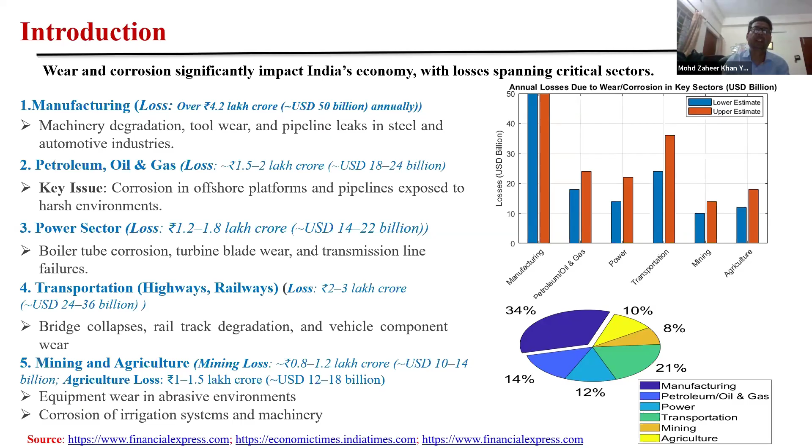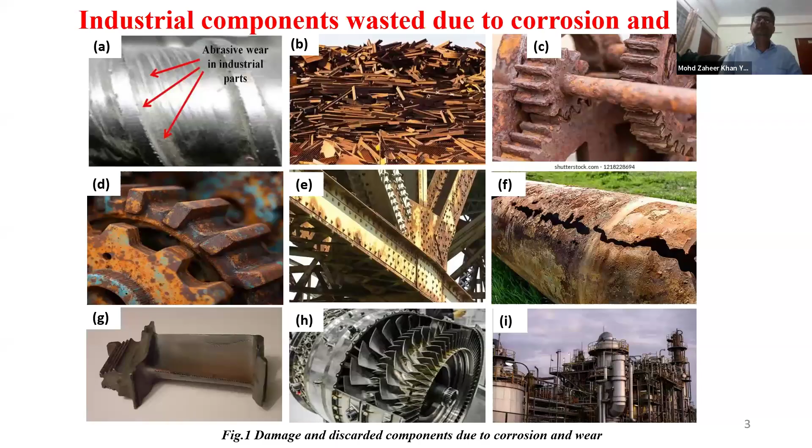So corrosion and wear cause great damage, and we have to do something about it. So what can we do? As I have mentioned, the materials that we are using are bound to get corroded. So there are two solutions that are available. One solution is that we use a material that itself is corrosion resistant, that is those metals and alloys that don't rust.

So generally what we see is that those materials that are corrosion resistant, that don't rust, are generally expensive materials, and these materials are not only expensive because of the raw material cost, but are also difficult to manufacture into the components and products that we desire to make. And second, an important thing is why at all use an expensive material when this corrosion basically affects only the surface part of the material.

So let us say we have got a component that is corroding. If we can do something to the surface, then the surface will not corrode and the underlying material automatically gets protected from corrosion. Similarly, if we talk about wear, then wear also is a surface phenomenon and it happens on the surface of the material. When two surfaces are rubbing against each other or some fine particles are impinging on the material, they are initially damaging the surface of the material.

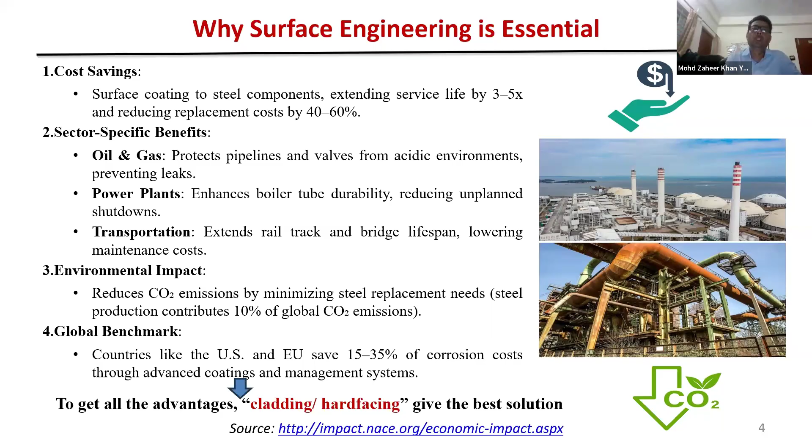So what is surfacing? Surfacing basically refers to the technique of depositing a material over a base material or substrate to impart some desired properties to the surface that are not intrinsic to the underlying material.

That means if we have a piece of material, it will have some intrinsic properties. If by some method we can deposit another layer of material on the chosen material such that its surface properties are altered in a desirable fashion, properties not inherently present in the material can be imparted on its surface. This is what is basically known as surfacing.

This property of corrosion resistance and wear resistance can be brought about by depositing the material with a layer of another material, and this additionally deposited material will have those desirable properties. If corrosion resistance is required, the deposited material will be corrosion resistant. If wear resistance is required, the deposited material will be wear resistant.

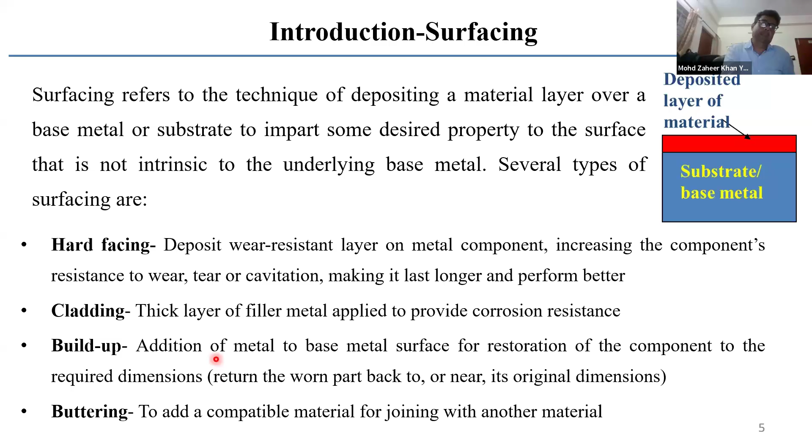So in this case, before the components are joined, a third material, generally Inconel, is deposited on the stainless steel. Since Inconel has a sufficient amount of chromium, the phenomena of sensitization will be prevented even if some carbon is migrating. This is another process of surfacing known as buttering.

Now let's talk about cladding. Cladding is the deposition of a material layer on the component surface to increase its corrosion resistance against a harsh environment. The cladding material acts as a barrier between the substrate and the corrosive environment.

The cladding we deposit can be either thin or thick cladding. Thin cladding is also known as film coating, generally a few microns in dimension, with a maximum of about 1,000 microns. These are generally carried out by processes like electroplating, physical vapor deposition, and chemical vapor deposition.

These coatings, being thin, act as a barrier, but if any problem happens to this thin coating—if it gets peeled out or scratched—then the underlying material will very easily be exposed and corrosion of this material will take place.

As an alternative, we can also deposit a thick coating, ranging from 1 millimeter in thickness to several orders of millimeters. For thick cladding, we cannot use physical vapor deposition, chemical vapor deposition, or electroplating because it would be very time consuming to develop thick films by these processes. So arc welding, explosive welding, laser cladding, and thermal spraying are generally used to deposit thick cladding.

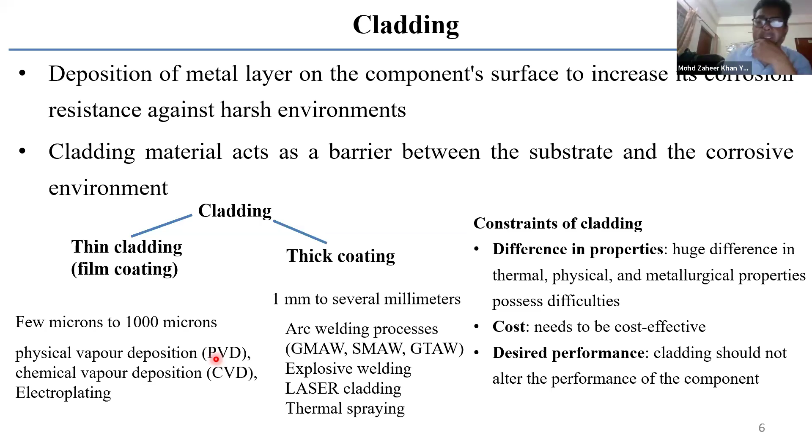The desired performance—the essential properties—means the cladding should not only perform well, but should not alter the performance of the component. So when depositing a material, we should ensure that the underlying material, on which we have deposited, does not undergo any adverse changes. Let us say we are depositing stainless steel on top of mild steel—this cladding process should not make the mild steel weak. Because if it becomes weak, it will not be able to sustain the loads it is expected to sustain. So that is another constraint in the cladding process.

In gas metal arc welding, there is already a filler material acting as one of the consumable electrodes, and a welding arc is made between the substrate and the filler material. In this case, the filler material will be made up of a corrosion resistant material. For example, if we want to clad stainless steel on mild steel, the substrate material will be mild steel, and the filler electrode used in GMAW will be made of stainless steel. When welding is performed, this filler material melts in the arc and gets deposited on the substrate, and successive passes of the GMAW process can completely cover the substrate with stainless steel. Similarly, other arc welding processes like GTAW can also be used.

Similarly, another arc welding process, GTAW, can also be used. GTAW is characterized by a very stable arc and a very clean weld. As you can see in this figure, there is a torch, an arc is produced, and a wire of the desired material is fed in. It melts in the arc and is deposited on the substrate. You can see the substrate underneath, and on top of it, round spherical layers of stainless steel or other clad material have been deposited—this is how cladding is performed.

There is another process known as thermal spraying that can also be used. Here you can see that there is either an arc, or in this case a plasma. An arc is initiated between the positive terminal and the negative terminal housed inside the torch.

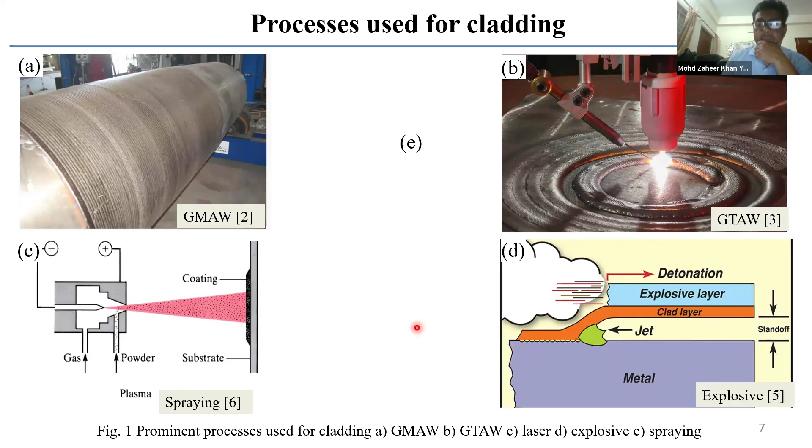So this is a small result that we are showing. In this case, we have deposited a layer of copper on mild steel substrate using gas metal arc welding process. The substrate was of mild steel. It was made as one of the terminals connected to the power source. The electrode in GMAW process that was used was of copper.

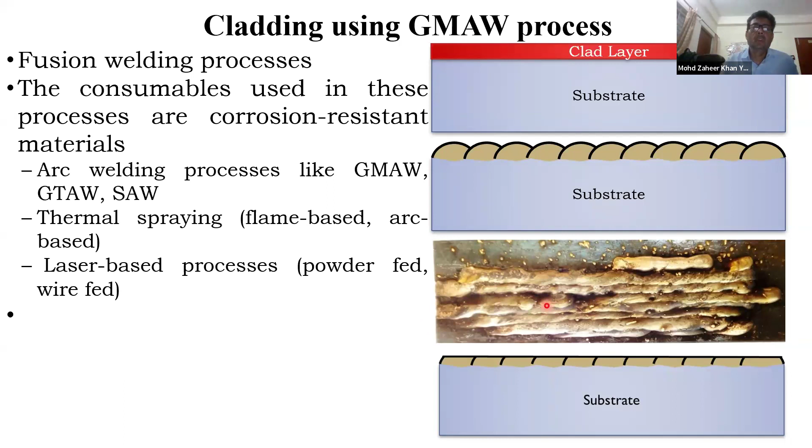So the copper electrode was passed and an arc was established between the copper electrode and the mild steel substrate. And here you can see successive layers of copper have been deposited on the mild steel substrate. Of course, whenever we are using these different dissimilar combinations, we have to do a lot of trial runs, and this is the photograph of the trial runs that were carried out, where the process parameters were optimized so that we can produce clad layers of sufficient quality.

When we are performing this experiment of depositing copper on mild steel using GMAW process, then several challenges occur. As you can see in this bottom diagram, when CO2 was used as a shielding gas, then a lot of spatters were occurring, and although beads could be established, because of the spattering, the surface became very rough and it was hardly any use.

When a little bit of argon was mixed with the carbon dioxide, so one of the students worked on this and he made a small setup where CO2 and argon could be actually mixed and fed as a shielding gas. Then the amount of spattering was less and we could successfully deposit copper on top of the mild steel substrate. So just to have a look as to how this clad layer has been performed, the plates were cut as shown in this figure and their cross section was examined.

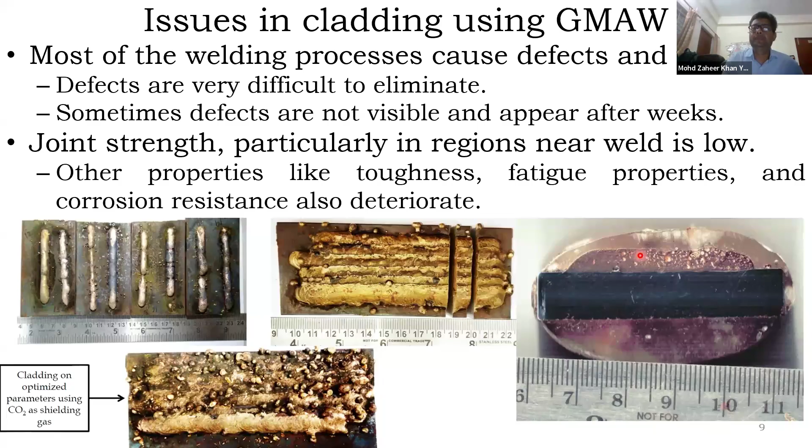So if you can see this cross section, this is the substrate of mild steel, and here on top you can see copper has been deposited. One thing that you will immediately agree is that a very uniform and thick layer of copper could be deposited on mild steel. But what is significant to note over here is that there is a lot of porosity present. So the clad layer, although it could be formed properly, has led to formation of a lot of porosity, and therefore this is problematic.

Another process that is commonly used and we are also using regularly is laser cladding. So laser cladding is basically an additive manufacturing process where laser is used to melt the material and the coating material both, and they can be deposited for cladding purpose also. Apart from performing cladding, this can also be used for the repair of the micro cracks that are present on the surface. It can also be used to reinforce or build up components that have worn.

It can naturally be used for prevention of corrosion and wear, that is cladding and hard facing, and this can also be used to customize the surface property of the material, that is, you can have a combination of powders where you can impart both corrosion resistance and wear resistance.

In laser cladding process, a laser heat source is utilized to deposit a thick layer of generally 0.05 mm to more than 2 to 3 mm of metals or ceramics, known as clad, on a solid substrate through this process. So you can see in this diagram, there is a laser light that is coming. It is producing intense heat.

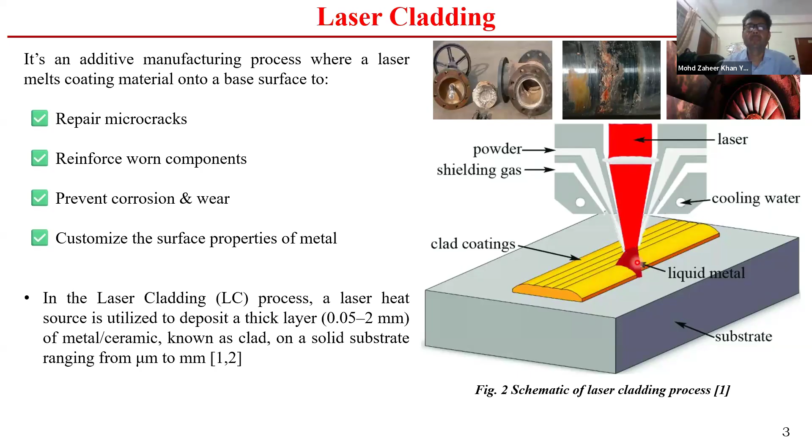There are several potential applications of laser cladding. So it can be used for the restoration of the gears. The gear surfaces that have worn out and the bearing surfaces that have worn out can actually be restored by depositing a layer of material.

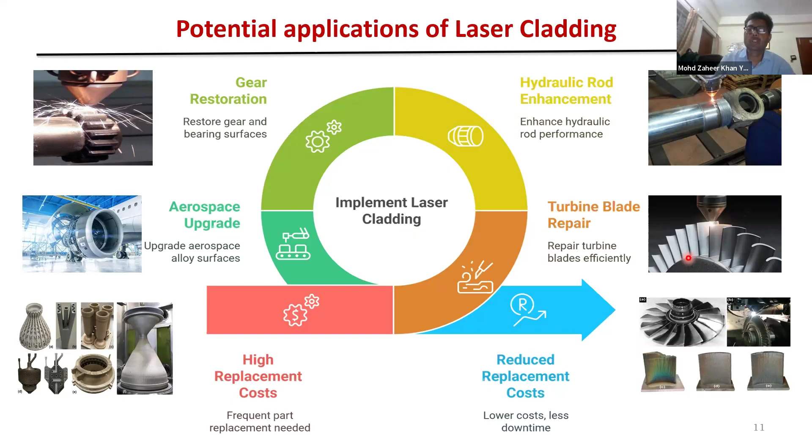They can be used for hydraulic rod enhancement in the hydraulic components. They can be used for the repair of turbine blades. They can be used also in aerospace upgradation. And in total, they will be reducing the high cost of replacement, and therefore it's a very much potential process. So this is basically the fundamental of the laser cladding system.

Laser cladding, also known as laser metal deposition, uses a focused laser beam to melt and fuse a layer of coating material. The coating material can be either in the form of powder or in the form of wire, which is put on the substrate. This enhances the surface properties like wear resistance, corrosion resistance, increases the hardness, or this can also be used for the repair of worn and damaged parts.

The core component of the laser cladding system is a laser source. The laser source can be many. It can be either a solid state laser, a fiber laser, diode laser, or CO2 laser. Only thing is that the power of the laser should be sufficient to melt the material and sometimes even the ceramics. There should be a beam delivery and optics.

So whatever laser is there, it is coming in form of a beam. This beam, to enhance its capability to melt the material, should be focused to a point, and for that you need a beam delivery system and the optics. Basically, they are in the form of lenses.

Now, this melting has to be accompanied with powder. So there should be a powder or a wire feed system. The material that has to be deposited can be in form of a wire, but generally it is in form of a powder. And this powder or wire is to be fed. And of course, since the entire surface of the substrate has to be covered, there should be a method by which the laser source and the powder can together move.

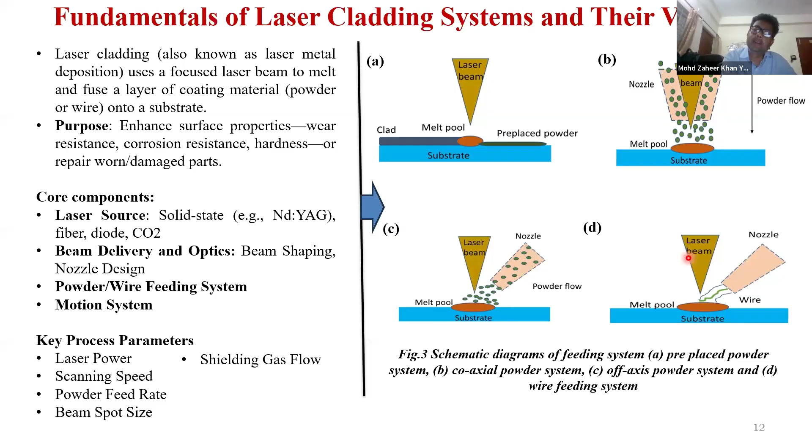There can be an off-axis powder system where the powder is being fed separately and the beam is actually following it and depositing the powder on the substrate. Similarly, wire can also be fed and the wire can be made to melt and get deposited. It is interesting to note that the wire feeding is generally done in an off-axis type of system.

This is the experimental setup that we have got in our lab. So there is a chiller because a lot of heat is being generated during the lasing operation. Of the energy that is given, only a part actually comes out in form of a laser, and most of the other energy converts into heat. So we need to have a very effective chiller to cool our lasing system, that is the laser source.

Apart from that, you need cooling pipes to protect your components, that is your cladding head, from getting damaged because of the laser. Similarly, in this figure, you can see this is the main laser head that is used. You can see that we can feed powder from these four sides. Inside this vertical tube, there are optics placed, and the laser will be coming at this end.

The powder will be also coming through this nozzle and getting deposited. There is a separate powder feed system that is attached to the machine. So we can actually use not one but more than one type of powder. The powder can be mixed also in this powder feed system, and it can be fed through the laser cladding

head and deposited. Generally, most of the material and the components need to be protected against reaction with the atmospheric gases. So argon is used as a shielding gas. But most importantly, this argon is also used as a carrier gas to make the powder flow from the powder feed system to the cladding head.

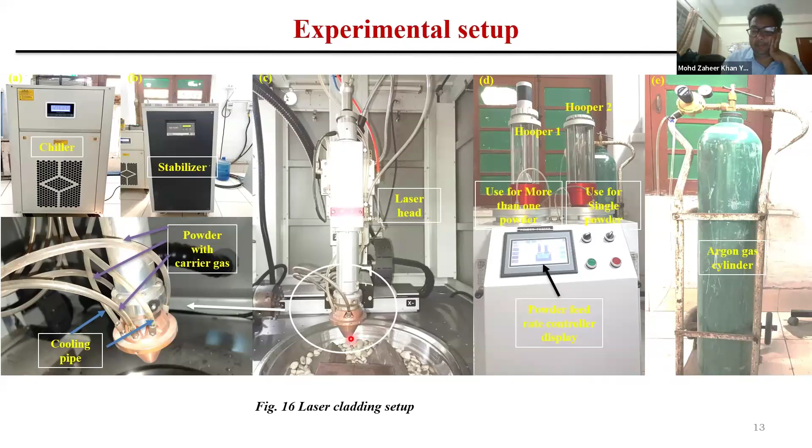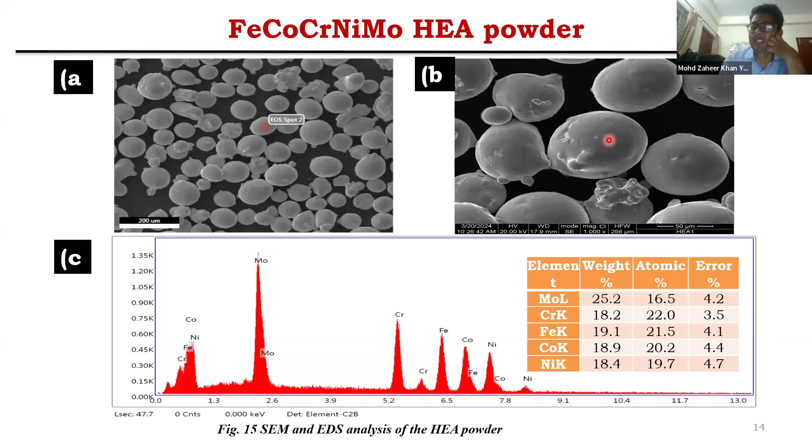So this is how the powder looks like. And let us say in one of the examples, a high entropy alloy powder was used. So you can see that it is having equimolar content of iron, cobalt, chromium, nickel, and molybdenum. So it's a 5 system HEA powder that has been used. And with EDX, you have to always confirm. The SEM will tell you whether the morphology is round or not, because this morphology affects its melting performance.

So, before any such experiment is performed, a single clad characteristic of the cladding has to be obtained. For this, a series of experiments were performed. So, what happened in this series of experiments is that we took a chosen powder, and we just made one single bead using the powder that is being used. So the laser head was moved on a plate from one end to the other end of the length of the plate, and a single bead was obtained.

This bead was actually cut across. When it was cut across, it looked like this, and this is the bead that we obtained after we have cut it and polished it. So after polishing, you can see there is a clad bead that is obtained, and the remaining portion is actually the substrate material. So, for any proper characterization, it is important that these parameters of the bead characteristic bead profile

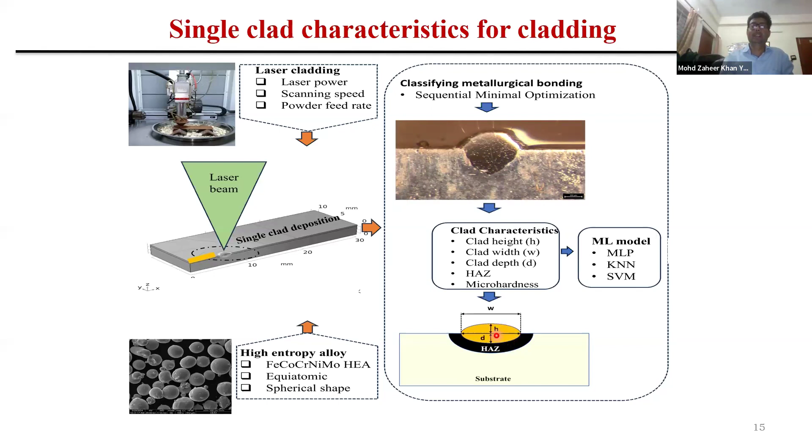should be noticed. The important characteristics are what is the depth of penetration or depth of melting that has taken place, what is the height of reinforcement that is created, that is basically corresponding to the thickness of the clad layer that has been obtained, then what is the width of the clad layer, what is the extent of damage that has been done to the substrate in form of a heat affected zone, and ultimately how this is performing. So micro hardness of the bead can be taken as one of the parameters.

So these types of experiments are performed. In this particular experiment, one of the students performed this experiment and deposited a single layer of clad in 16 different combinations of laser power, scan speed, and powder feed rate. And then these clad width, clad height, clad depth, heat affected zone thickness, and micro hardness. And apart from this, the dilution was calculated as this.

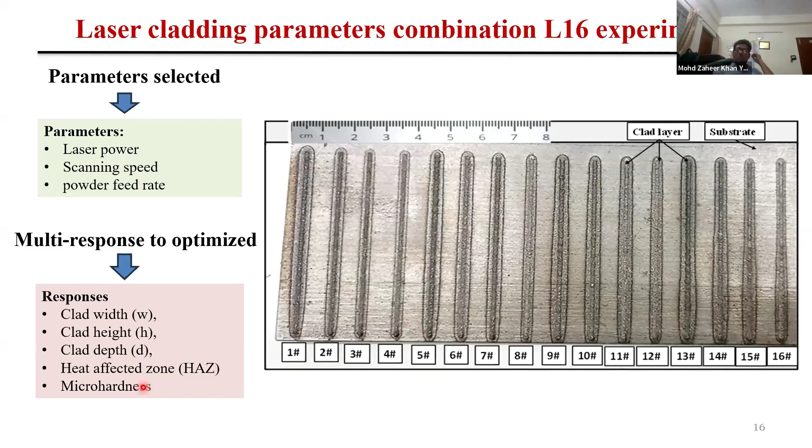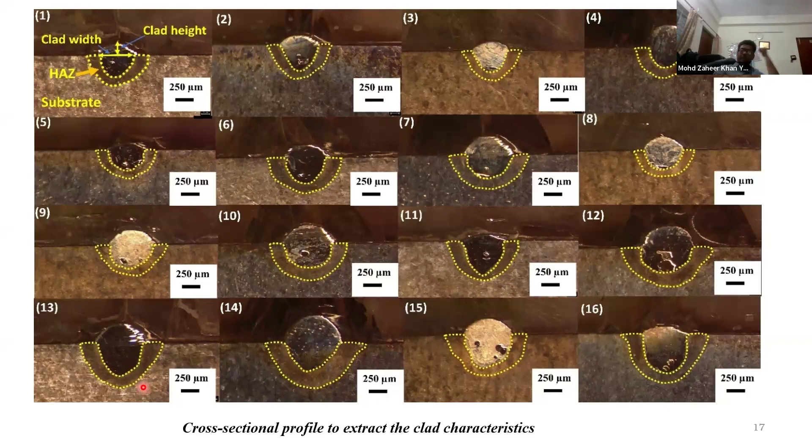So all these plates were actually cut across, and the measurements of clad width, clad height, dilution, the thickness of the heat affected zone were measured, and after measuring, it has been tabulated like this. So at different process parameters, different values of clad height, clad width, heat affected zone are obtained, and clad height and clad width basically dictate the extent of dilution that we are obtaining in this particular case, and consequently this is reflected in form of change in hardness of the material.

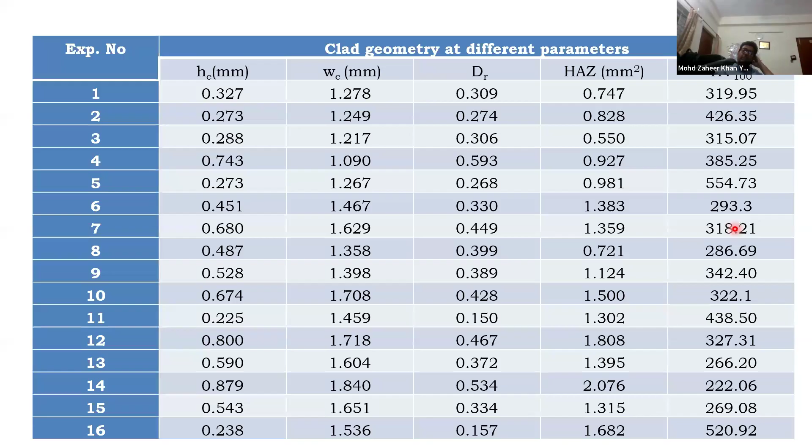Now, laser cladding is again a fusion based technique for deposition, and this has got an inherent problem, and that inherent problem is that whenever I am depositing a layer of clad material on the substrate material, it is essential that some amount of substrate material should also melt.

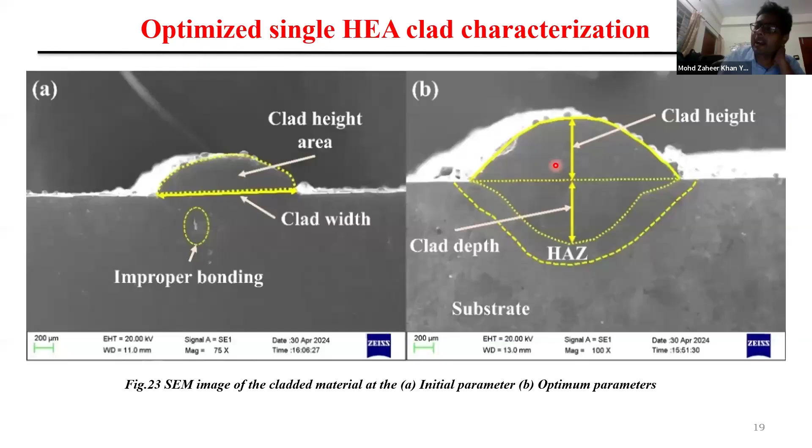And in this case, it may not offer the desired property as it is desired from a clad layer. So it is important that mixing of the clad and the substrate should not take place. And friction stir welding is another technique that has been used to deposit a layer of clad material.

So how much time is remaining? Let me check. Oh, it's already 9. So I'll just finish in 15 minutes quickly.

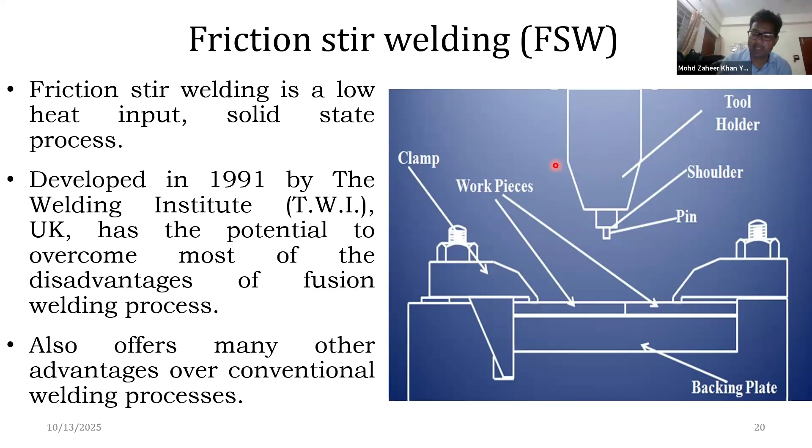So friction stir welding is a solid state, low heat input joining process. It is one of the new processes, developed in 1991, and it offers most of the advantages of solid state welding processes. So these are the advantages: it produces a defect-free joint or clad, it improves the mechanical properties, it has high productivity, it's a simple, repeatable and consistent process, it does not require skilled manpower, it has good surface finish, and it can be used for positional welding and cladding.

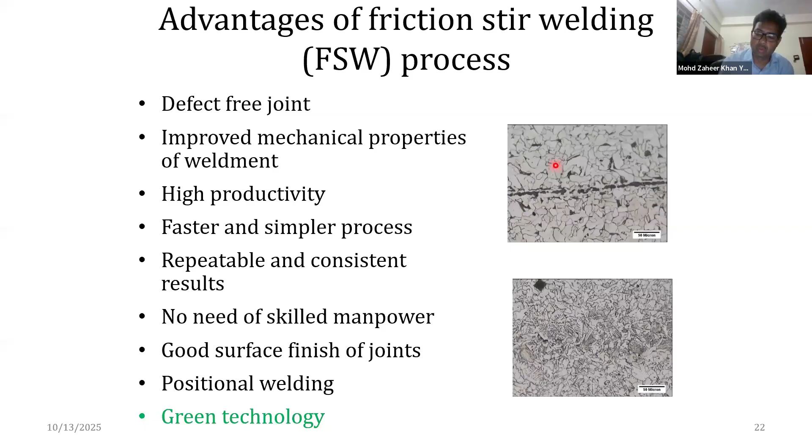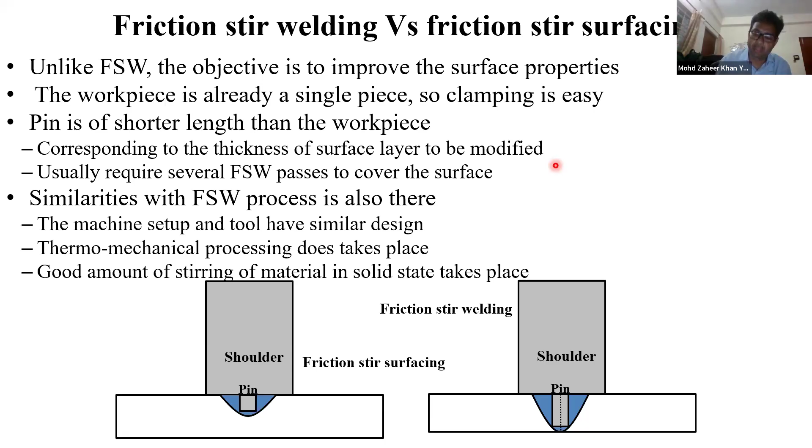The good thing is it's a solid state welding process, so no mixing of the substrate and clad material will take place, and the material that we are depositing will remain relatively pure. So this is how several passes are made. Let us say on a substrate there is a clad plate that has been placed. Overlapping passes are made like this, and the entire plate can thus be covered. And if required, a little bit of machining can also be carried out.

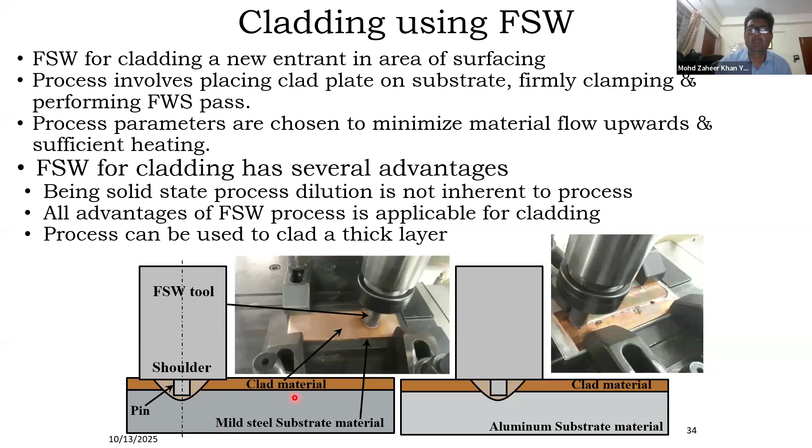So this is the first experiment that we have carried out. In the first experiment, we deposited a layer of copper on the aluminum substrate. And in the other set of experiments, we deposited a layer of copper on top of a mild steel substrate using multiple friction stir welding passes. Just like any process, here also we faced a lot of difficulty.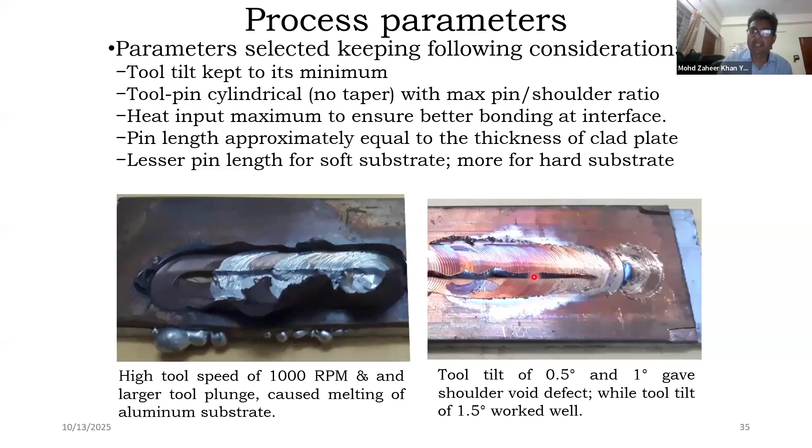If the process parameters were not optimized, in the case of cladding of copper with aluminum, there was melting of the substrate, as you can see over here. And in the case of welding of mild steel with copper, there were defects like shoulder voids, excessive flash, and other defects.

So after several trial runs at the process parameters listed in the table, we could successfully deposit a layer of copper on top of the mild steel substrate at a tool RPM of 700, a tool translational speed of 100 millimeters per minute, tool tilt of 1.5 degrees, shoulder diameter 20 millimeters, pin diameter 6.5, and the pin length was kept 3.5 because the thickness of the clad layer that we were trying to deposit was 3 mm.

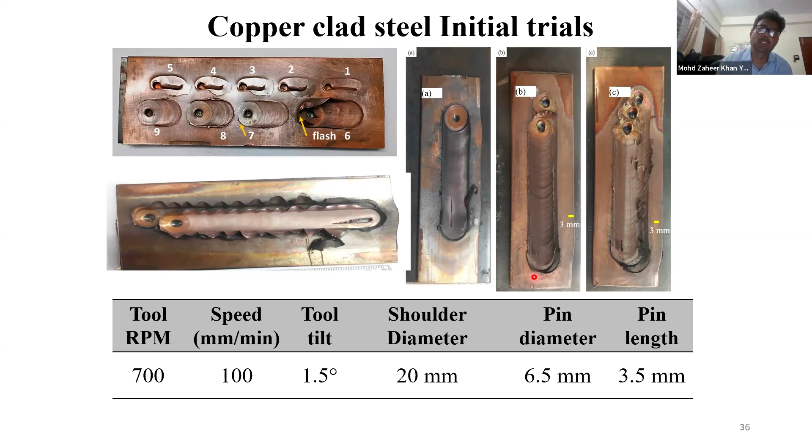Then the other part was how to select the offset distance. So this schematic will help you. If we are performing friction stir welding, then this parabolic stir zone is created, and this stir zone is known as the weld nugget. The width of the weld nugget at the interface of the clad is demonstrated by this arrow. So the maximum offset that we can give is equal to this distance. If any more offset is given, then there will be an unbonded portion remaining.

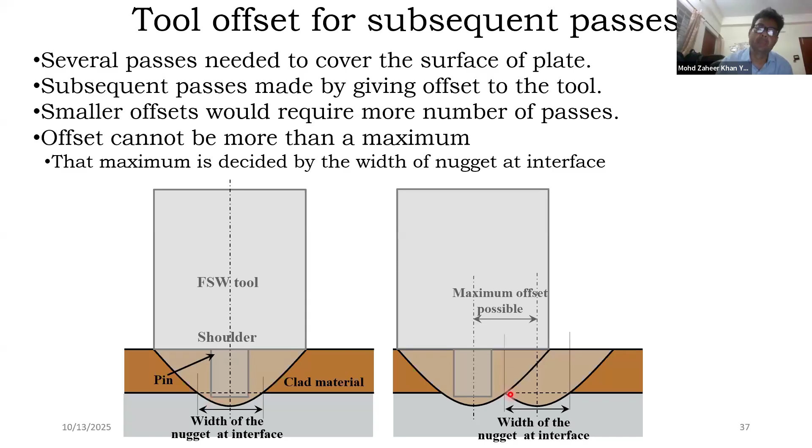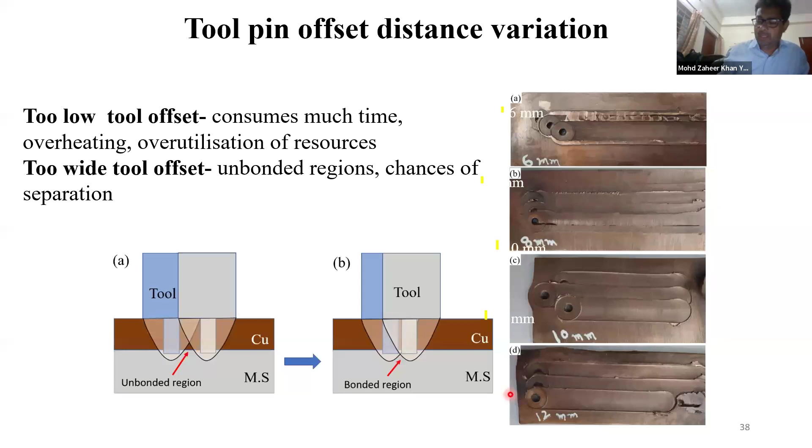So similarly, several trials were carried out, and it was found that an offset of 8 mm was sufficient. If more than 8 mm was given, then there were unbonded regions, and if a very small offset was given, then unnecessarily many welding passes had to be carried out. So this is the radiograph of the cladded plate that has been produced.

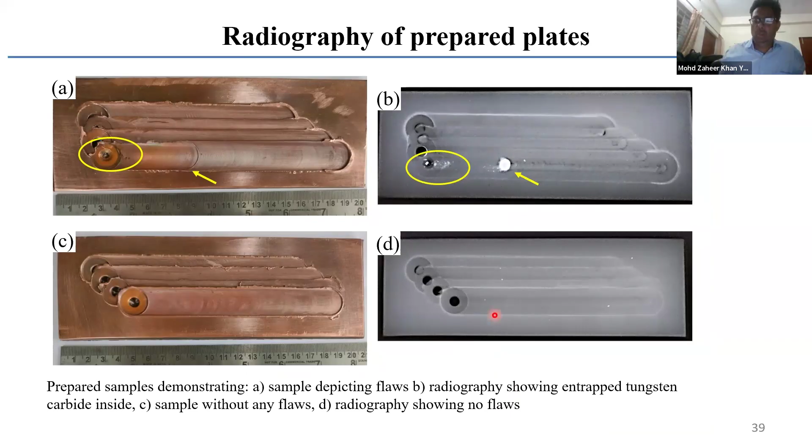As you can see, if the parameters were not right, these defects can occur. You can see this is a defective plate, and this one is a defect-free plate. No defects are actually obtained. This is the microstructure and macrostructure.

You can see very firmly the mild steel and the copper plate have been anchored. This is not only macroscopic anchoring that has taken place, but as you can see at the magnified level, there is microscopic bonding that has taken place between the two materials. But what is important to note over here is that the mild steel is not mixed with the copper on the top layer.

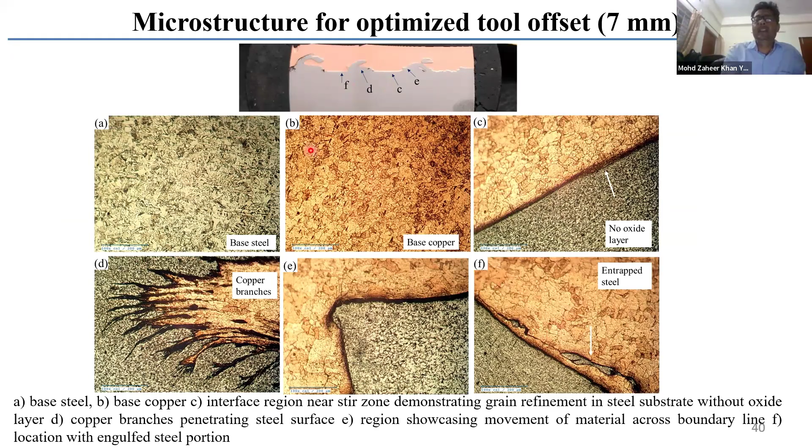Then, of course, some mechanical tests were performed, like hardness, tensile testing, and bend test, and this is the result of the bend test. After the plate has been cut and it was bent in a tensile testing machine, you can see even after bending in all the three directions, no disbonding is actually taking place.

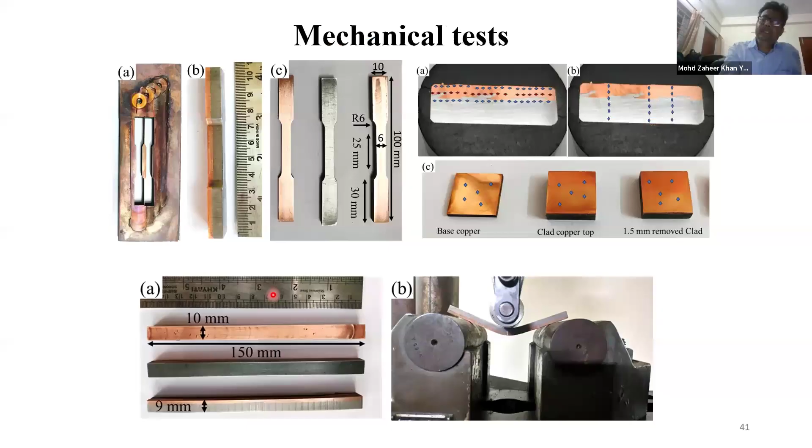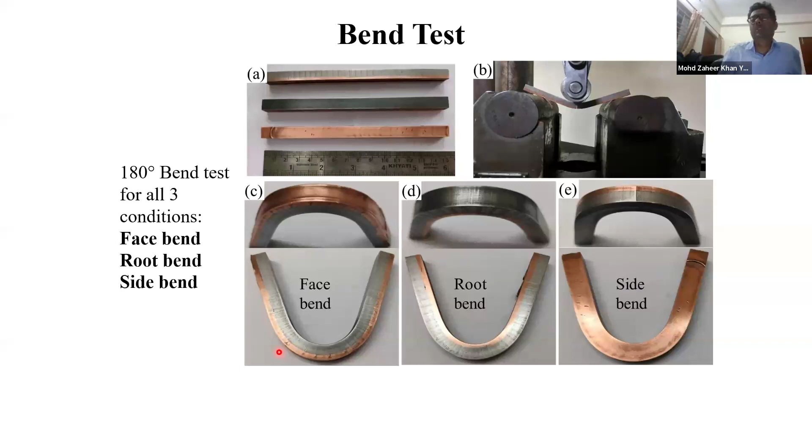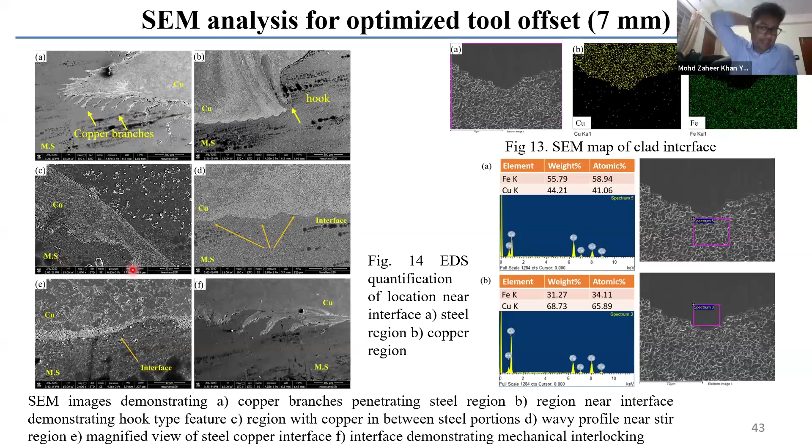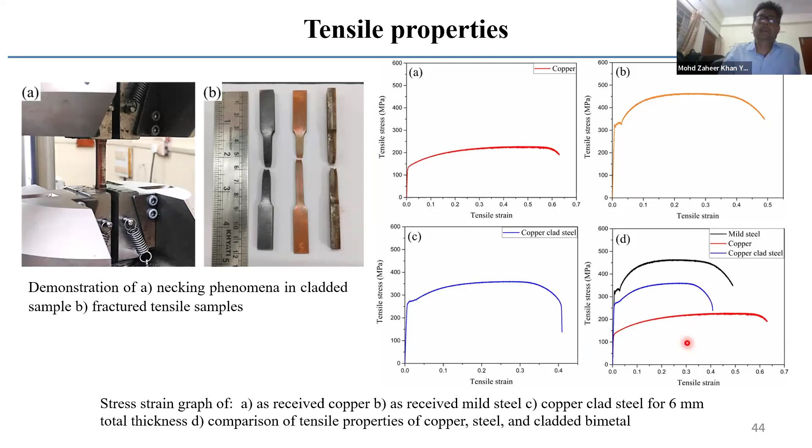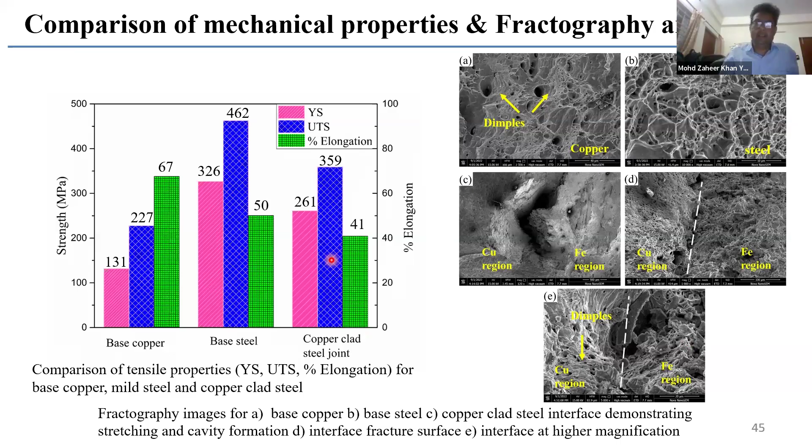These are the fractographs, and this is the comparison of the yield stress, percentage elongation, and ductility of base copper, base steel, and copper cladded steel. This is the SEM and mapped EDX image of the fractured sample, and you can see even during the tensile testing process, there is not much transfer of copper into steel, and most importantly, iron into copper. This I have already shown you.